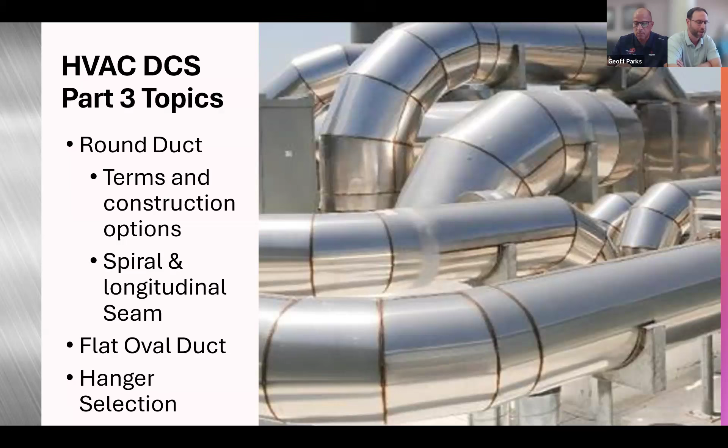As a recap for those who were with us at our last session, we went over rectangular ductwork, exterior and interior reinforcements. For this part, we're going to get into round ductwork, terms and construction options, using spiral and longitudinal seams. We're also going to get into some flat oval ductwork construction options, both spiral and longitudinal, and then some hanger selections. So jumping right into it.

So the first part here, we're looking at round duct joints and seams. We're going to check out the transverse joints first.

There's a little thing in the way of my screen. Got it.

First off, we have our RT1, which is our beaded sleeve joint. A couple things to point out on this one, it can be used for longitudinal or spiral seam applications. You want the sleeve to be at least the same gauge as the ductwork, minimum 4-inch long sleeve. Your attachment or screw requirements, use uniform intervals of at most 15 inches along the circumference, and then 3 screws minimum on duct diameters 14 inches and less.

The next one we're looking at down here is our companion flange, the RT2 or Van Stone flange. This one can also be used on longitudinal or spiral seam applications, and we have minimum flange sizes on this detail. For diameters up to 14-inch, we would require a 1-inch by 1-inch by 10 gauge angle, and duct diameters over 14 inches would be 1.5 by 1.5 by 1/8 inch. These companion flange sizes would not qualify as joint reinforcements, but if you want your flanges to qualify as a joint reinforcement, we would use table 3-4, which we'll get into shortly.

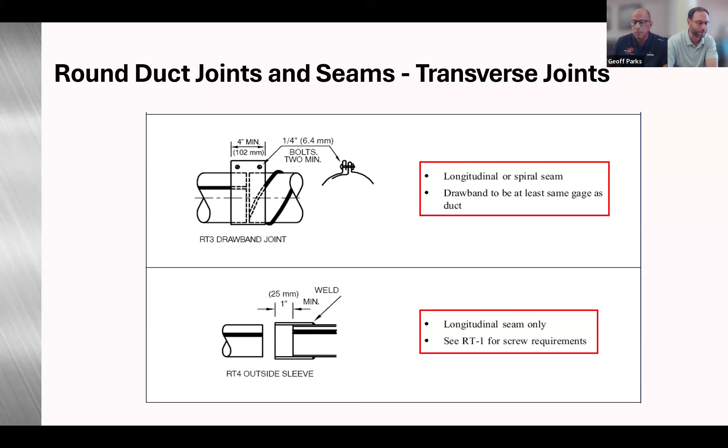Next up is the RT4, just below our RT3, the outside sleeve. This is going to be for longitudinal seam applications only, and you would follow the seam requirement or screw requirement for the RT1.

Next up, we have our RT5, the crimp joint bead option, 1-inch minimum lap, good for longitudinal and spiral. Again, you're going to follow the RT1 for any screw requirements.

And then we have our RT6, the swedge or bell. This is going to be a longitudinal seam application only, and also RT1 for your screw requirements.

Here we have next up would be the slip-on flange. If you recall from our last program, discussing this for rectangular, this is something that you would want to consult the manufacturers for their ratings established by the performance documented to the functional criteria in Chapter 11 of the Duct Standards. This is going to be your AccuFlange, SpiralFlange, any proprietary product that may have been reviewed by the SMACNA Testing and Research Institute would be on our website, and then it would be verified as an acceptable alternative to use.

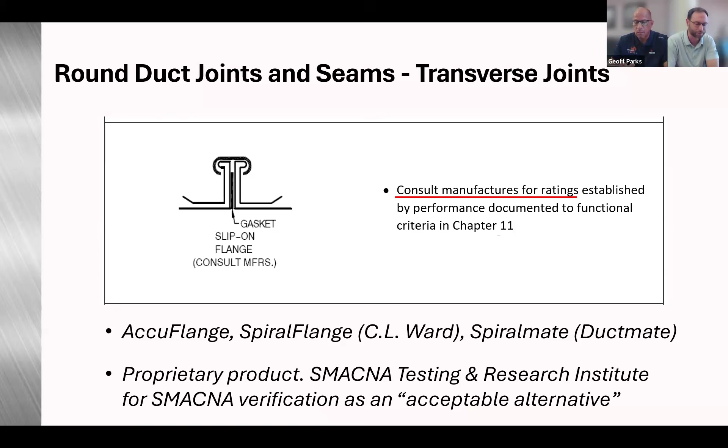Next up, we have our round longitudinal seams. So we kind of looked at the longitudinal or our transverse joints. Here we have an RL1 spiral seam. It can be used up to 10-inch water gauge and is good for positive or negative applications. Any pressures greater than 10-inch water gauge, we want to refer to the Round Industrial Duct Construction Standard, and also any duct diameter greater than 96 inches would put you in that round industrial as well.

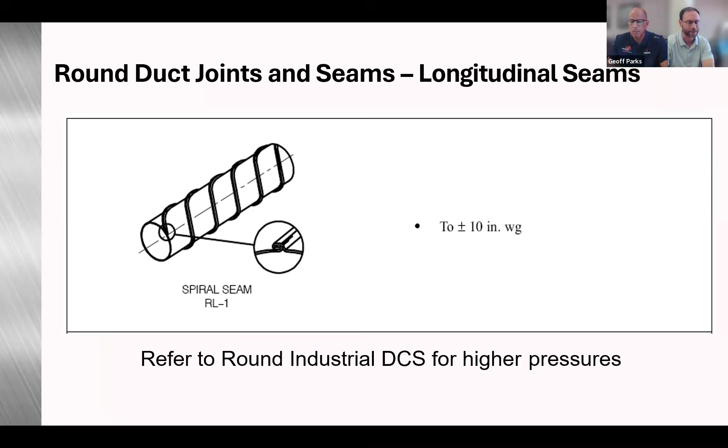Moving on with more longitudinal seam, we have the RL2, RL3, or lap joints. These can be used on positive or negative 4-inch water gauge applications. It is acceptable to 10-inch water gauge if it's spot welded on 1-inch intervals or tack welded on 3-inch intervals.

And then just below that, we have our RL4. This would be the butt weld or lap and seam weld, and this is also good for positive or negative 10-inch water gauge.

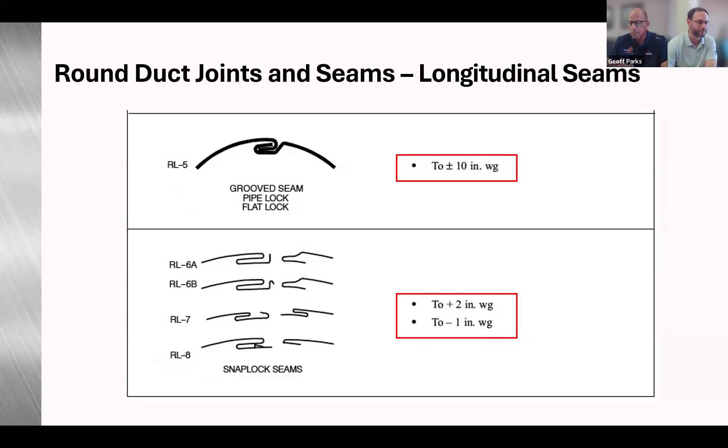Next up, we have our RL5. This is our groove seam, our pipe lock or flat lock, also good for positive or negative 10-inch water gauge. And then just below that, we have all of our different snap lock seams, RL6A, B, 7, and 8. This would be good up to 2-inch water gauge positive or negative 1-inch water gauge applications. Anything above those, you would need to look into some of the other longitudinal seam choices.

So I did mention our round reinforcements a little bit. In the standard, we have 3 tables: table 3-2, 3-3, and 3-4. 3-2 is going to be the angle ring size, so this is our reinforcement sizing requirements. Table 3-3 would be the ring attachment schedule, so this is your minimum attachment points to the duct wall. And then table 3-4 is going to be any companion flange joint that would be used as a reinforcement and qualify as a joint reinforcement.

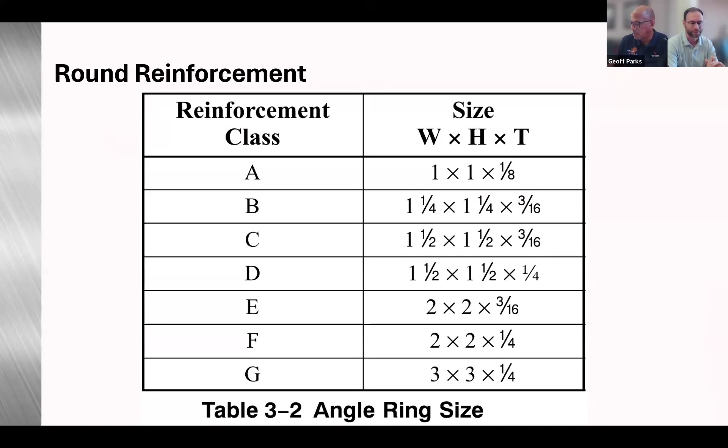Taking a look at table 3-2, as you can see, we have A, B, C, D, E, F, G reinforcement classes, starting at 1x1 by 1/8 inch, all the way up to 3x3 by 1/4 inch.

And then table 3-3, this is going to be your ring attachment schedules. This is based off of diameter size range: 6 and under, 12 to 7 inches, 18 to 13 inches, and so forth. The right side of this table is going to give you your number of attachment points. So if you have a 12-inch diameter and you're attaching your angle reinforcements, you would need a minimum of 6 attachment points.

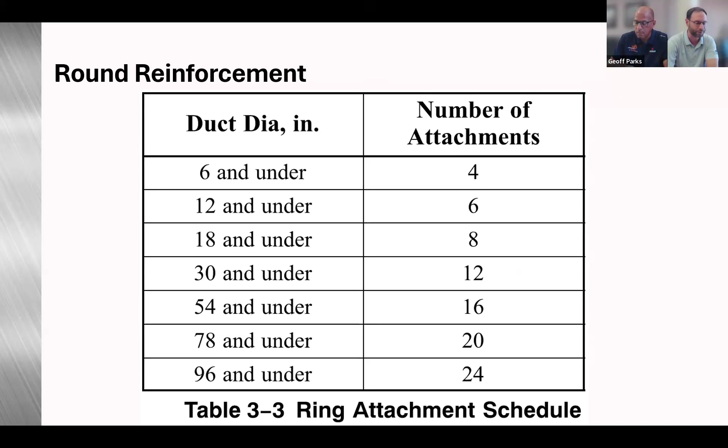All right, so round duct, a couple of things to throw out here. High strength to weight ratio uses the least amount of material to convey air. Fabrication for negative pressure is adequate for equal positive pressure.

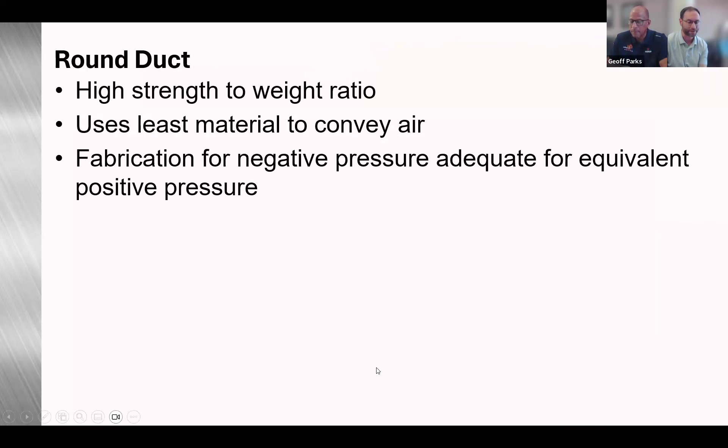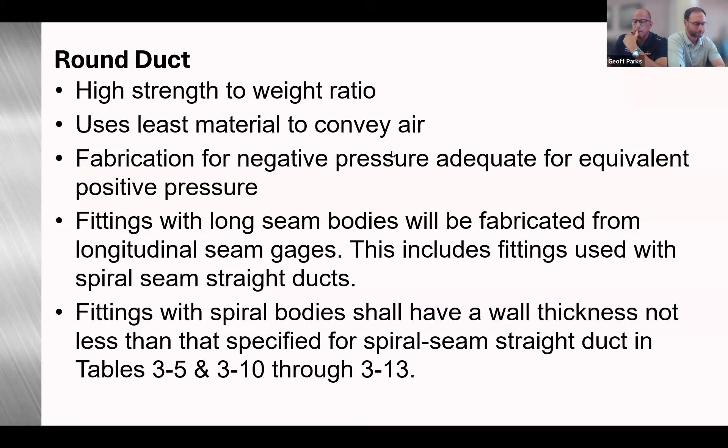Fittings with long seam bodies will be fabricated from longitudinal seam gauges. This includes fittings used with spiral seam straight duct. Fittings with spiral seam bodies would follow the same wall thickness, not less than specified for spiral seam straight duct. We have tables for these minimum gauges, which is table 3-5 and 3-10 through 3-13, and we'll get into checking some of those tables out a little bit later in the program. And finally, ribs and corrugations may add strength to round duct.

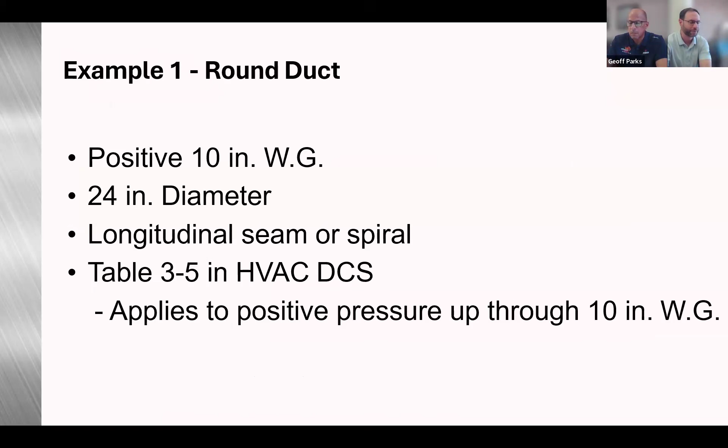So we're going to jump into an example here. This first example, we're going to build some positive 10-inch water gauge, 24-inch diameter round, and we're going to use either longitudinal seam or spiral seam for this. For this one, we would go to table 3-5, and this applies to positive pressures up through 10-inch water gauge.

So this is probably one of the easiest duct construction tables to read. You come to table 3-5, check your diameter range. For this one, we have 24-inch diameter. Our longitudinal seam minimum gauge is going to be 24, and our spiral seam minimum gauge for the same diameter would be minimum 26 gauge. At these gauges, no other reinforcements will be required. So this is the unreinforced round duct gauge up to 10-inch water gauge.

Yeah, but I'm muted. Oh. Now you are.

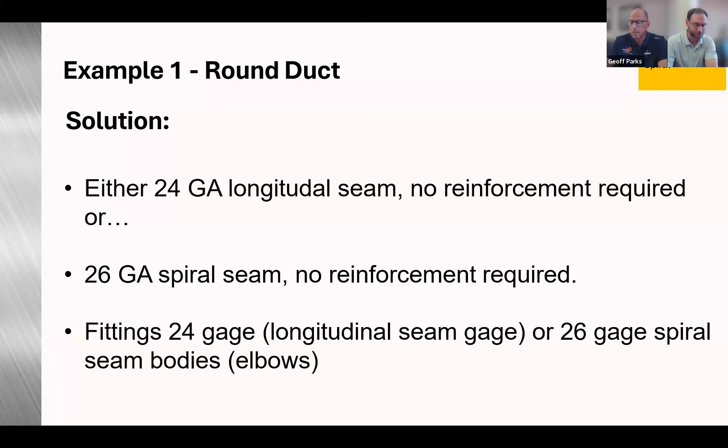All right, so for our solution here, this first example, we would have either 24 gauge longitudinal seam or 26 gauge spiral seam, and again both of those options would require no additional reinforcement. Our fitting gauges would be 24 gauge for the longitudinal seam, and if we were using a spiral seam bodied elbow, you would follow the spiral seam gauge, which would be 26 gauge for that elbow.

So next up we have a longitudinal seam round we're going to build. This is going to be a negative 10-inch water gauge, same diameter, and we'll be using longitudinal seams. For this one we would use table 3-6 through 3-9 in the duct construction standards for negative pressure longitudinal seams, while table 3-10 through 3-13 is for spiral. The negative pressure classes covered are negative 2-inch, 4-inch, 6-inch, and 10-inch water gauge, and within the tables there are multiple solutions available based on your reinforcement spacings.

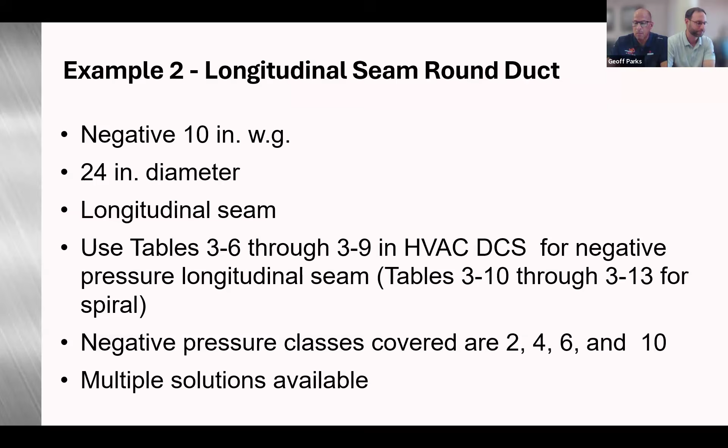So checking out this table, this is table 3-9. This is the minimum gauge required for longitudinal seam duct under negative pressure. Again, we're looking at 10-inch water gauge for this one. And you can see in the red rectangle I have here, there are many options based on either unstiffened, no reinforcements required, or stiffener spacing of 20 foot, 12 foot, 10 foot, 6 foot, all the way down to 5 foot.

So if we were looking to use the 5 foot section, something that you can roll within your roller machine, you would build this out of 24 gauge, and then you would need an A class reinforcement at the center of each piece, which would result in a stiffener spacing of 5 feet.

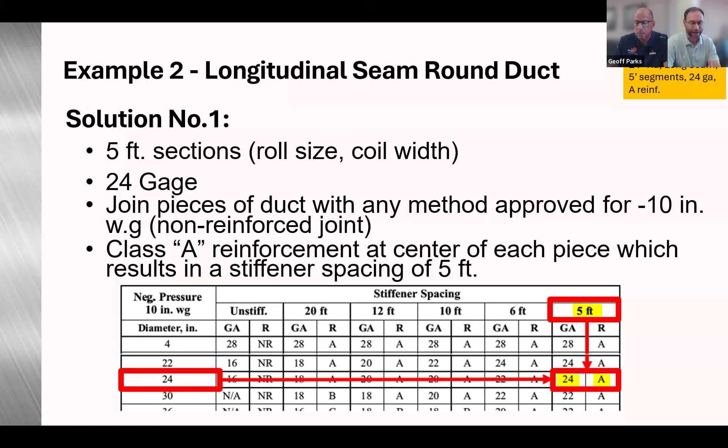So now we know, coming back to this one, we're using our 5-foot stiffener spacing. We have our minimum gauge, which is 24, and we have to find out what the requirement is for that A reinforcement. We'd go back to table 3-2 and check that an A reinforcement is going to be a 1 by 1 by 1/8 inch angle. Now we know what the angle size is.

We'd jump over to table 3-3, and this is going to give us our ring attachment points. Since we're looking at 24 inch, we'd go to the 30 and under, and it tells us we need 12 minimum attachment points for that angle. The rings may be attached to the duct wall using screws, rivets, or tack welds.

So this is an example of what that solution would look like. What we'd do is join 2 5-foot sections to make a 10-foot joint. You could use a beaded sleeve because that's good up to 10-inch water gauge. Then you'd have your A reinforcement class angles at the midpoint of the 5-foot sections, giving you a 5-foot stiffener spacing for that build.

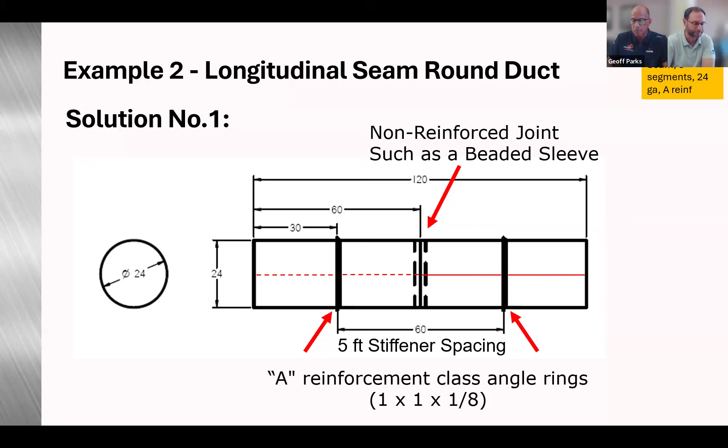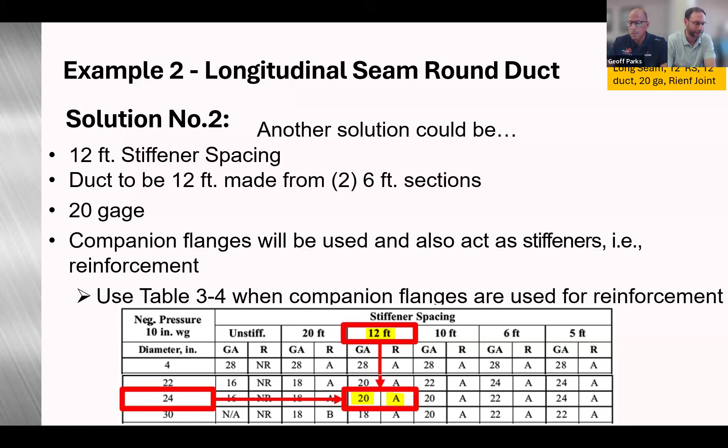Another option from the same table would be using 12-foot stiffener spacings. This could be made from 2 6-foot sections, taking into account that if you have a 6-foot roll capacity, this would be made out of 20 gauge. We could use companion flanges that also act as stiffeners for reinforcements. So what we'd do is check table 3-4 to see what the size requirement is for these companion flanges, and we're looking for an A reinforcement.

So table 3-4 is for companion flange joints used as reinforcements. Check, based on our duct diameter for this one, which was 24 inches, we'd look at our 13 to 25 inch diameter range. And it's telling us we need a 1.5 by 1.5 by 3/16 angle for that companion flange.

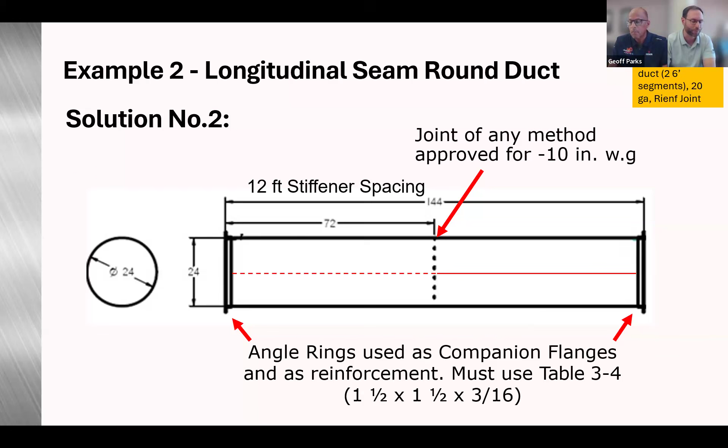So looking at a detail of how this build could possibly go, you have your 2 6-foot sections, and you could join with any approved method for negative 10-inch water gauge. This one, you can weld it, you can do a beaded sleeve, and so on. Then what we're doing is putting the angle rings as companion flanges on each end, making a 12-foot section, and that would be our 12-foot stiffener spacing. Again, those rings would be 1.5 by 1.5 by 3/16 rings based off of table 3-4.

A third solution could be making 16 gauge using the unstiffened, no reinforcement required column. You can make 2 5-foot piece sections, shop butt weld, and then no additional stiffeners or reinforcements would be required at this gauge.

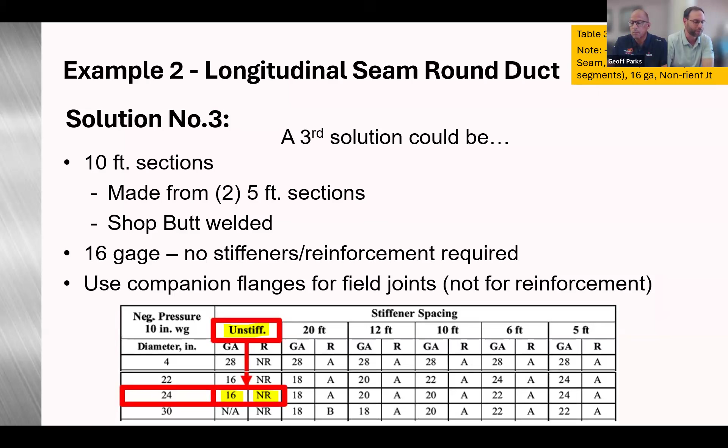You could also use the companion flanges for field joints that would not act as joint reinforcements, but for ease of field connections. Again, those companion flanges, from figure 3-1, have the minimum size of 1 by 1 by 10 gauge up to 14-inch diameter. So if we chose that route on this build, looking at 24 inches, we would need 1.5 by 1.5 by 1/8 inch. Again, those wouldn't count as joint reinforcements, but it doesn't matter because we're using minimum 16 gauge unreinforced.

And then this is a detail of what that third option would look like.

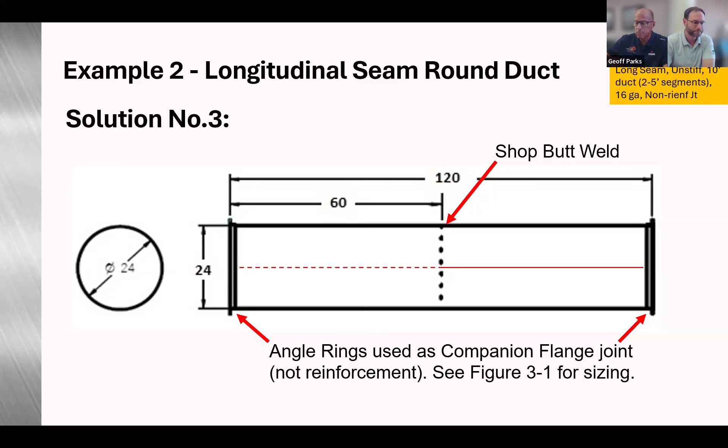So now we're going to look at an example building some spiral seam round duct. This is negative 10-inch, 24-inch diameter. We're going to get into the spiral seam tables, which are table 3-10 through 3-13, and more specifically we'll be looking at 3-13, which is for negative 10-inch water gauge.

As you can see from this table, it looks identical to the longitudinal seam, and it's also kind of mimicking the rectangular tables that we looked at a few weeks back, giving us our minimum gauge, our minimum reinforcement requirement, with an A, B, C, all based off of your duct size and the stiffener or reinforcement spacing that you select.

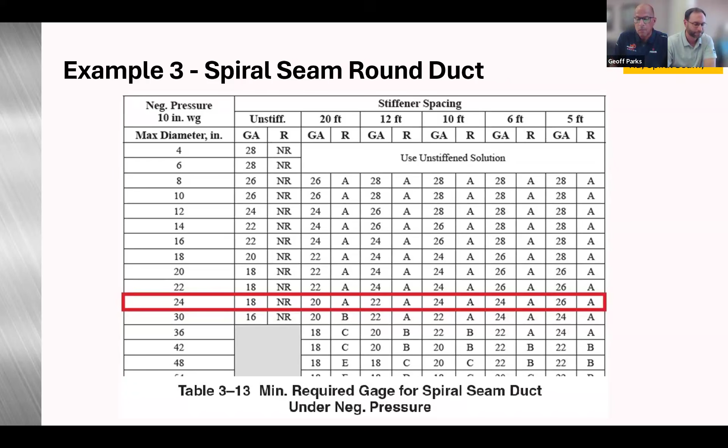So spiral seam round solutions. I'm not going to go through the whole thing, but the process is identical to the long seam. There's multiple solutions again, based off of unstiffened, no reinforcement, or 20-foot, 12-foot, 10-foot, 6-foot, 5-foot reinforcement or stiffener spacings.

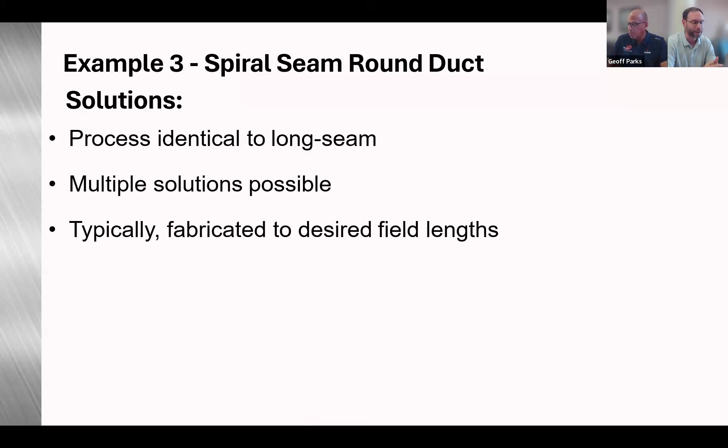Typically with spiral, you can fabricate to desired field lengths, instead of just sending out a 10-foot stick. You can set the machine to cut 24, 36, 30, whatever round length joint you want. Typically for spiral, lighter gauges are available than using long seam construction. Any fittings used for spiral duct systems are fabricated from longitudinal seam gauges, except when using the spiral seam body fitting elbows, which would follow your spiral seam gauges.

All right, a little bit of commentary on single wall round duct liner. You'll find this in section 7.6 on page 7.16 of the standard. Round ducts using single wall kerfed rigid board insulation liners do not normally require pins, adhesive, or other types of mechanical securement in straight duct sections.

But there are some exceptions. If the insulation slides easily in the duct, if there's a loose fit, on vertical runs or other risers greater than 45 degrees from horizontal, where the vertical drop exceeds 16 feet, clips must be installed on every other liner section and finished with a row at the end section.

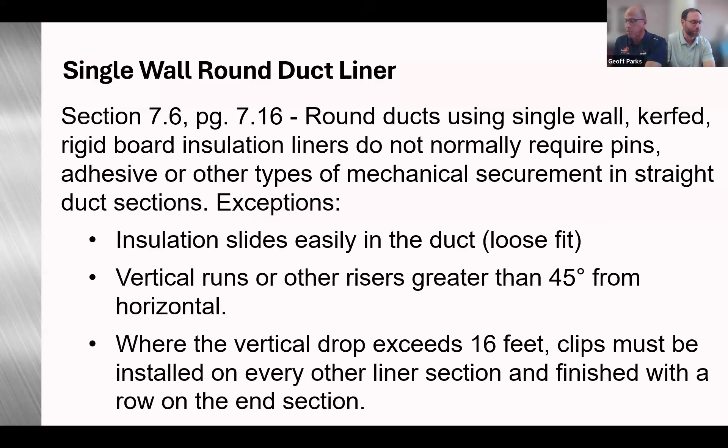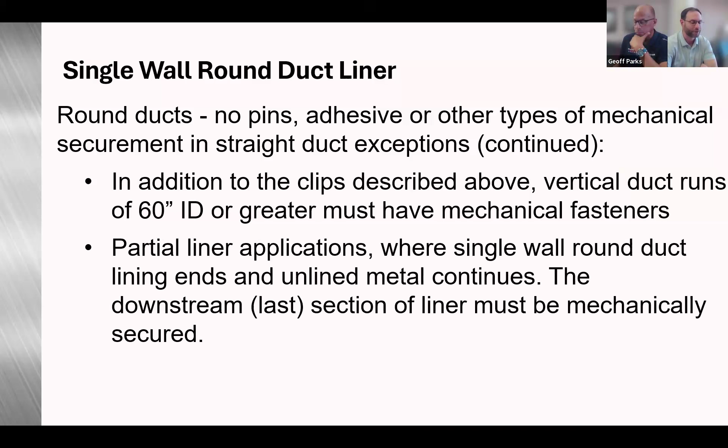In addition to the clips just discussed, on vertical runs of 60-inch diameter or greater, you must have mechanical fasteners. When you have partial liner applications, anywhere you have single wall round duct and the liner ends and the unlined metal continues, the downstream or last section of the liner must be mechanically secured. Negative pressure applications, obviously you're going to want to secure that liner. And you'll always want to follow the manufacturer's installation instructions as well.

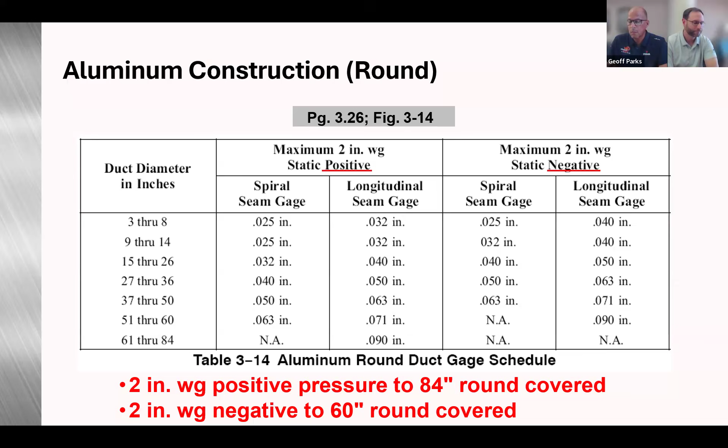All right, so we've got through our round duct construction options. Now we're going to check out some flat oval duct. The standard covers longitudinal seam positive pressure, and then spiral seam positive and negative pressure.

Longitudinal seam minimum wall thicknesses would follow table 3-15 for the minimum gauges, and that's going to be based off of the major dimension of that flat oval ductwork.

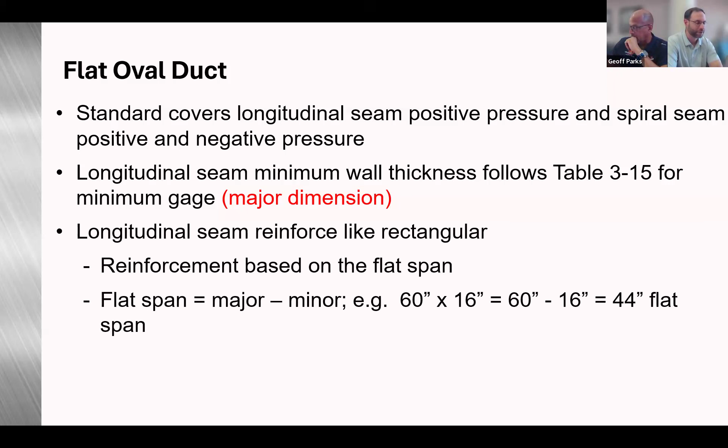Longitudinal seam flat oval is reinforced like rectangular, and that reinforcement is going to be based on the flat span. Your flat span is equal to the major dimension minus the minor dimension. So if we had a 60 by 16 flat oval duct, you would do 60 minus 16, which gives us a 44-inch flat span. That's what you're going to use to base your reinforcements on.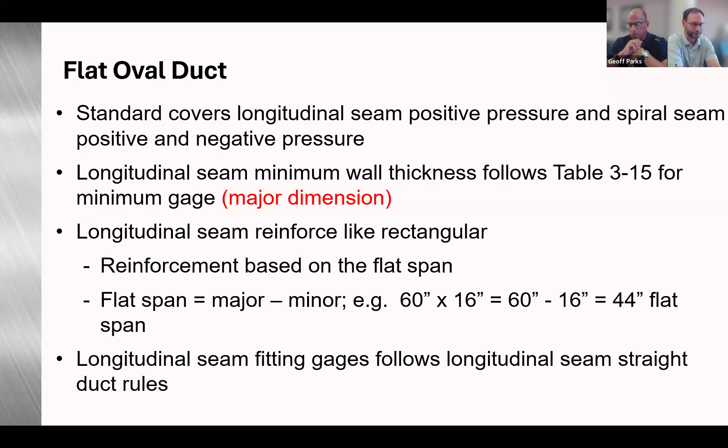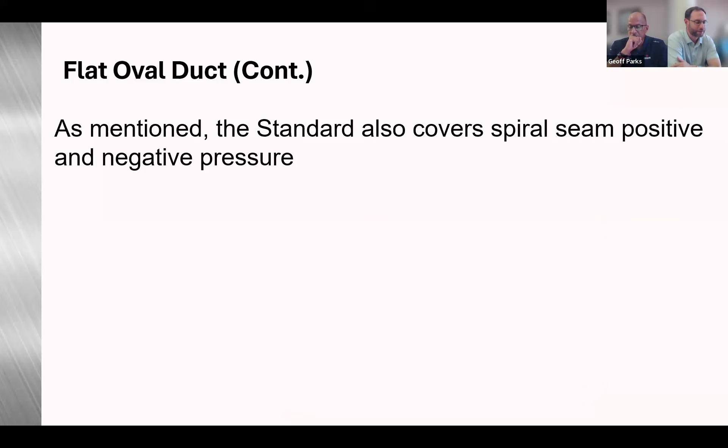Like I mentioned, the standard also covers spiral seam, positive and negative pressure. These construction tables are separate construction reinforcement tables, table 3-16 through 3-22.

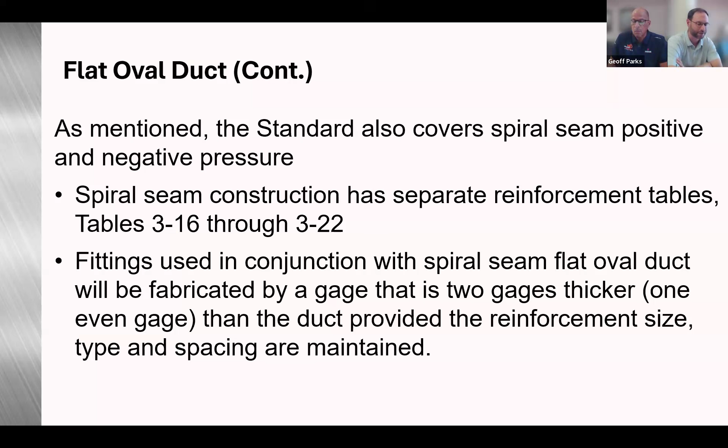Any fittings used in conjunction with the spiral seam flat oval duct, you would fabricate 2 gauges thicker—1 even gauge heavier than the duct—provided that the reinforcement size, type, and spacings are maintained. Sometimes working with really big elbows there's a little bit of confusion on how to reinforce, but you would just maintain, say you pick a 4-foot reinforcement spacing, you're just going to maintain that 4-foot reinforcement spacing throughout that entire fitting.

So for longitudinal seam flat oval duct, here we're looking at table 3-15. This is your minimum gauge up to positive pressure 10-inch water gauge. This is based off the major dimension, not the flat span, but the major dimension of the flat oval duct. As you can see, we have your longitudinal seam minimum duct gauge and the fitting minimum duct gauge associated with those major dimensions.

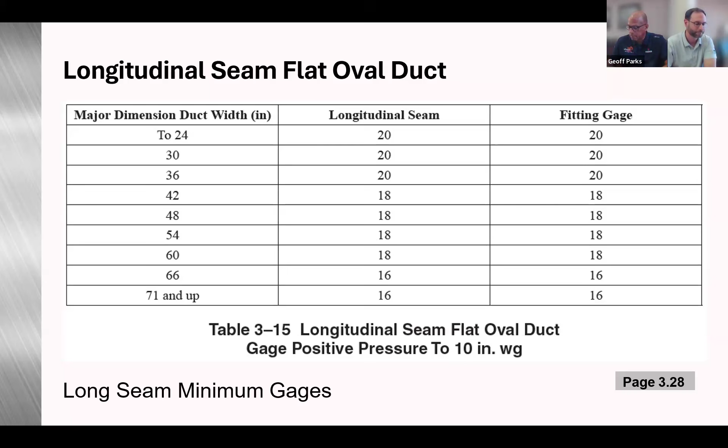Jumping into an example, building some longitudinal seam flat oval duct. For this example, we're going to be looking at 46 by 20 at positive 10-inch water gauge. We have our major dimension of 46, our minor of 20, and our flat span is going to be 26 inches. So first step, we need to determine our minimum gauge, and that's going to take us to table 3-15.

Again, for this table, we do follow the major dimension—it's based off the major dimension. Just throwing that up again to reiterate our flat span. So jumping to table 3-15, based off of the major dimension we have, we're going to be looking at the 48-inch row, which gives us a longitudinal seam requirement of 18 gauge and a fitting gauge requirement of 18 as well.

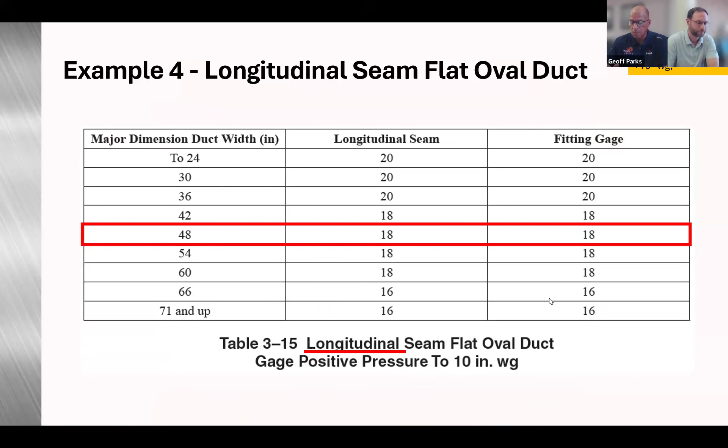So now we know the minimum gauge. Next, we need to determine our reinforcement requirements. And like I mentioned earlier, this is going to be based off of the flat span, which for this particular example is 26 inches.

So now we need to go to the correct rectangular duct construction table. We would select our reinforcement spacing, and then determine which reinforcement class requirement we have based off of that flat span and the reinforcement spacing we select.

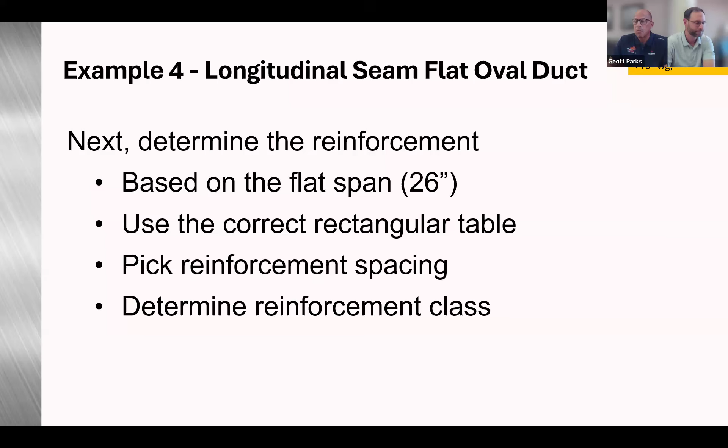For this example, we would follow the 10-inch water gauge construction table, and our flat span is again 26 inches. We have the option to pick from 8-foot reinforcement spacing down to 2-foot reinforcement spacing. This table simply tells us which reinforcement code we need to follow, because we already selected the gauge from table 3-15.

So if we were looking to build this duct with 5-foot reinforcement spacings, we would need an H18. The 18 we can ignore because we already had that gauge selected from the previous table. So we're going to look at either the H, or we can do a G class reinforcement while using or adding a tie rod.

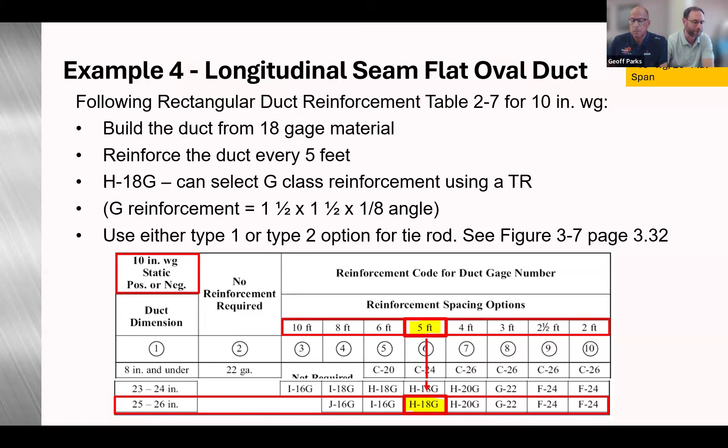So now we're going to look at spiral seam flat oval duct. We checked out longitudinal seam, now we can go into spiral seam. We're going to use the same flat oval duct size for this one, 46 by 20, looking at 2-inch water gauge. Again, we have our major dimension, minor dimension, and flat span all equal to our previous example.

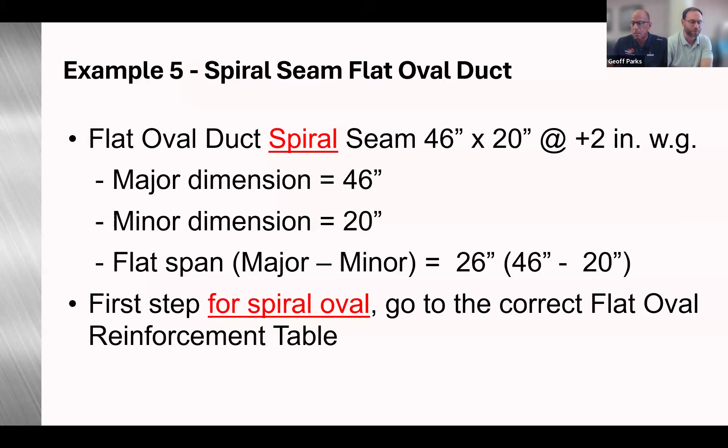But for this one, we need to make sure we go to the correct flat oval reinforcement table. So for that, we would be looking at table 3-18. This is going to be the spiral flat oval reinforcement table, and this is all based off your flat span. For our example, we're still looking at a 26-inch flat span.

And we have some options here. We can choose the unreinforced column, which would give us 18 gauge. There's a 12-foot reinforcement spacing, a 6-foot reinforcement spacing option, and then a 3-foot reinforcement spacing option.

So if we were looking at the 6-foot reinforcement spacing option with this flat span, we're looking at an external reinforcement class of an E, minimum duct gauge of 22. And then there's also an option to add a tie rod, and that's telling us we would need 1 tie rod for this particular build. So it's either you would follow the external reinforcement or the option of 1 internal tie rod. Both are not required.

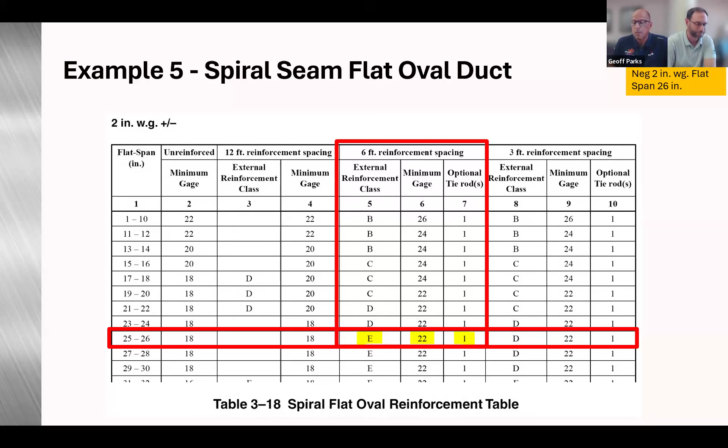So following the spiral seam flat oval table, table 3-18, we would build the duct from 22 gauge. We reinforce the duct every 6 feet based off of our reinforcement spacing that we selected. We would use the E-class external reinforcement, or optionally, we could use 1 tie rod. And then any fittings fabricated would be 20 gauge based on that 2-gauge rule, or 1 even gauge heavier for your fittings.

So double wall round and flat oval, we went over rectangular double wall in our last program. And again, this is similar in construction to that rectangular double wall. The inner wall is typically not attached to the outer. Primary function is to attenuate sound. And then you also still have the risk of through-metal or condensation with double wall round and flat oval, similarly to rectangular.

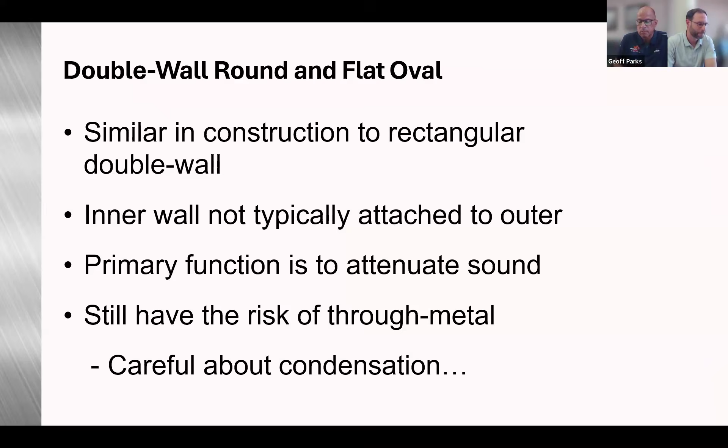And just throwing that detail up here again for through-metal concerns. All right, throwing up a couple double wall flat oval details. You're going to have your outer pressure shell, which is going to be your construction shell, and then you have your inner liner, same as rectangular double wall.

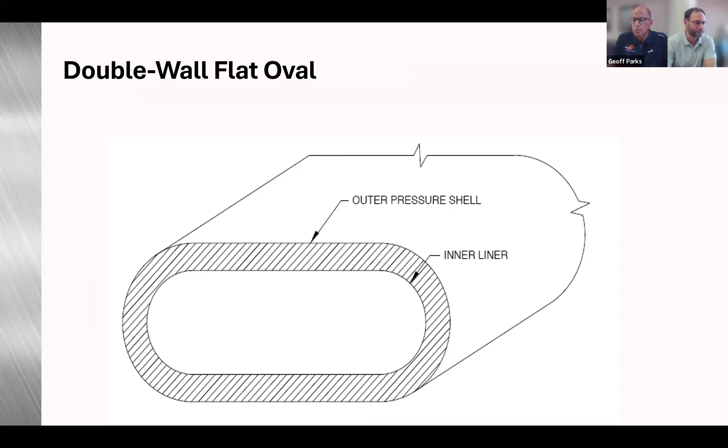Some fastening requirements: your outer sleeve needs to be a minimum of 4 inches long. Inner sleeve is going to be a minimum of 6 inches. And then both the inner and outer sleeve would need to be the same gauge as your outer pressure shell.

On the outer coupling, screws must be used at uniform intervals, 15-inch max along the circumference, and 3 screws minimum on 14-inch or less.

Here we have a couple other duct joint options in the standard. Figure 8.2 for double wall round, that's going to be a drawband type on the outer pressure shell with an inner collar or inner sleeve coupling. And then you also have figure 8.10, which is a Van Stone option as well.

There's a 4-inch minimum on that angle ring. And then obviously you also have your inner sleeve as well. This would require a minimum of 3/8 inch flange on the ductwork for that Van Stone connection.

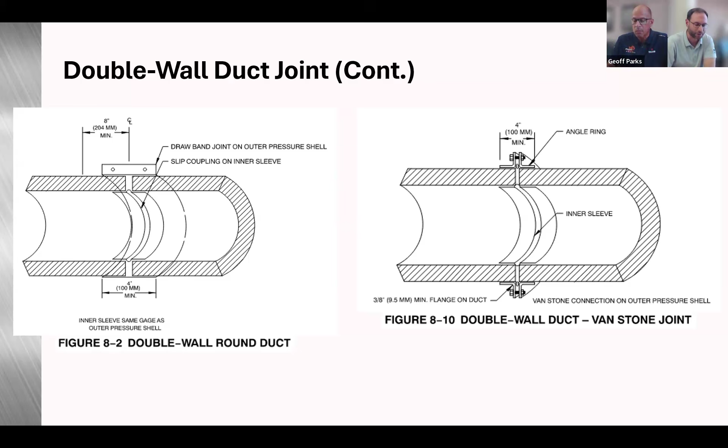All right, so we've gotten through round, we've gotten through flat oval. Now we're going to get into a little bit of hangers and support systems.

Some basic definitions of hanger components: your upper attachment, which is the attachment up to the structure, your lower attachment, which would be between your hanger and your trapeze or ductwork. Then you have your hanger, which is the vertical section, which could be wire, rod, or strap. And then your trapeze, which is your horizontal section, your angle, channel, and so forth.

Here we have just the different options that are laid out within the standards. I'm not going to read through each and every one, but I do want to point out the big red text in the middle there. So this is an important one: your allowable load on the upper attachment, which is going to be 1/4 of the failure load of that upper attachment. So that's kind of the main thing I want to point out with any upper attachment requirements to the structure, 1/4 of the failure load.

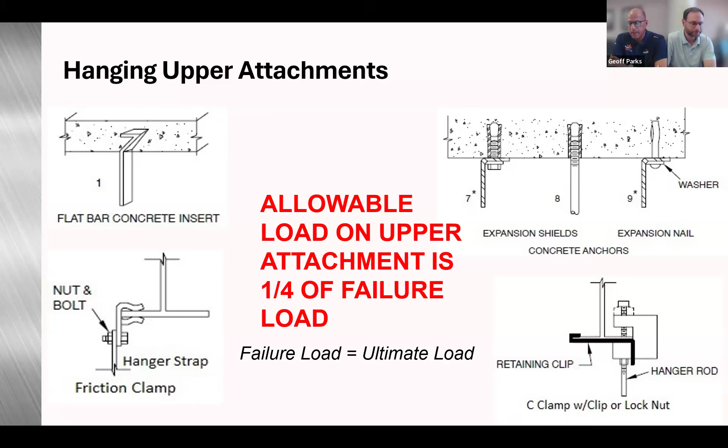And just a note for our California contractors, the flat bar concrete insert shown in the upper left, we did test that in accordance with ASCE 7 requirements, and it did pass fully. So we do comply with the requirements of ASCE 7 for inserts that you would use in projects in the state of California. We also tested, as Geoff is showing here now, the wire coil and also the 1-inch minimum double circle. We tested all those in accordance with ASCE 7 and they passed.

We do have a technical resource bulletin that's posted up on our website under technical services for that, if you need to use that for discussions with the general contractor, the inspector, whatever it might be. But that information is available, the test results are there also.

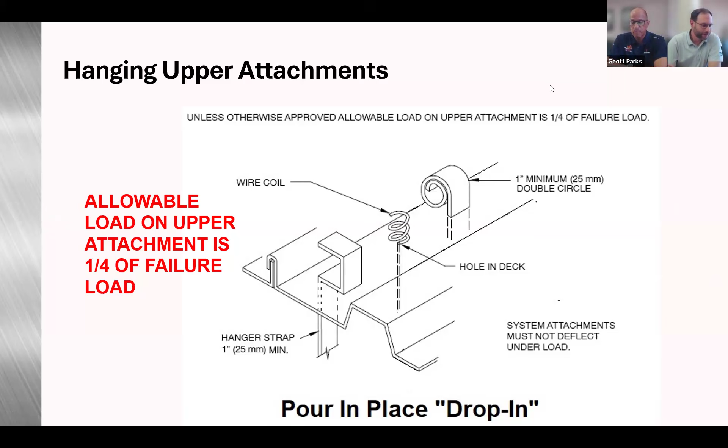Perfect. Thank you. All right.

Now some hanger lower attachments. Left detail is going to be your hanger strap. Then there, 1 screw, 1 foot, a 1-inch minimum foot on your strap hanger with 1 screw at each foot. And screws may be omitted if the hanger loops as a continuous loop underneath your duct.

Looking at some round hanger lower attachment options, wire is good up to 10-inch diameter. And this isn't wire that we're talking about like a gripple or anything like that, this is just thin shot wire. Everybody freaks out, but this is not the pre-stressed aircraft cable, this is just a wire.

So the next one over in the middle, up to 36-inch diameter, this would require a single hanger strap and then a separate single band. You would want that band to be the same size as the hanger strap.

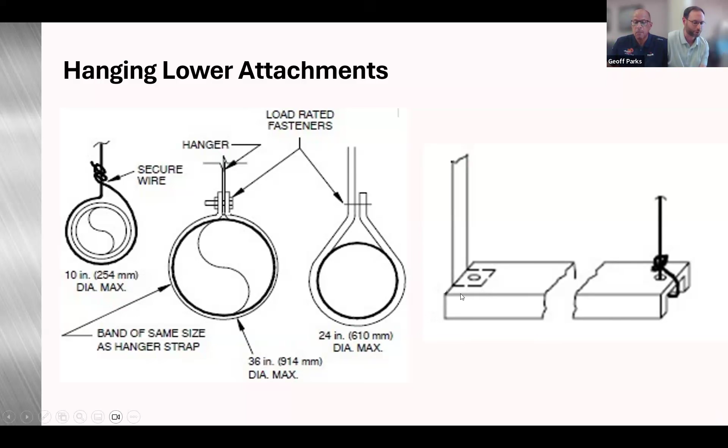Once you get into diameters that exceed 36-inch round, you're going to have a two hanger requirement, and that again is either going to be rod, wire, or strap. For this detail, we are showing double saddle strap, saddles top and bottom. That is not a requirement of the standard to have both of them, but if the duct does deform and become out of round, you would look to add the top band.

When you're using strap hangers, 60-inch max is kind of the requirement for hanger strap, unless the foot of the strap is placed under the bottom of a reinforcement. So if that strap hanger happens to land on a duct reinforcement, you are permitted to go wider than that 60 inches.

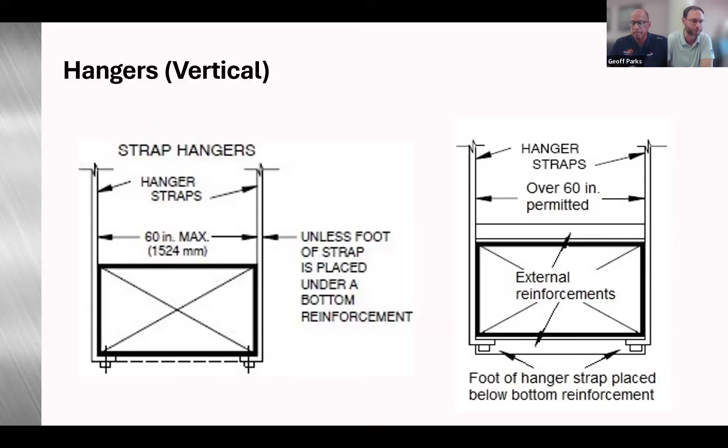And here we have our cable hanging system. For this, follow the manufacturer's installation instructions. You can visit the SMACNA Testing and Research Institute website for any that have been SMACNA verified as an acceptable alternative, but the most important thing to note is to follow the manufacturer's installation instructions. These are not permitted to be used in any area where you have moisture, such as a pool application, since the devices just don't hold up in those situations. Also, when we're talking about static ductwork, you want to make sure the locking mechanism is perpendicular as shown in the detail here. They have different styles for seismic bracing, which would be different than what we're talking about here, which is just basically hanging static ductwork.

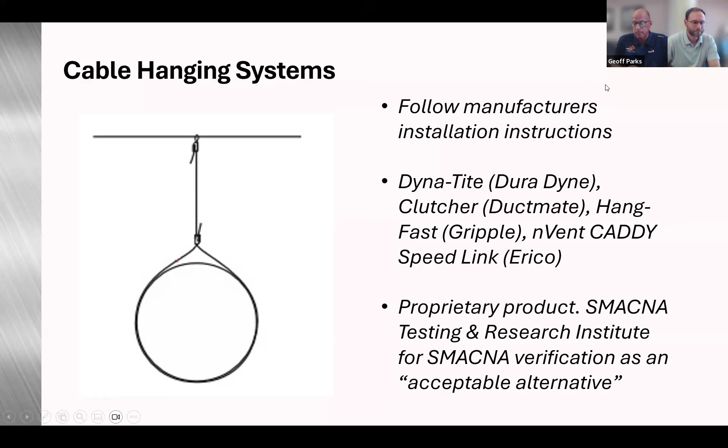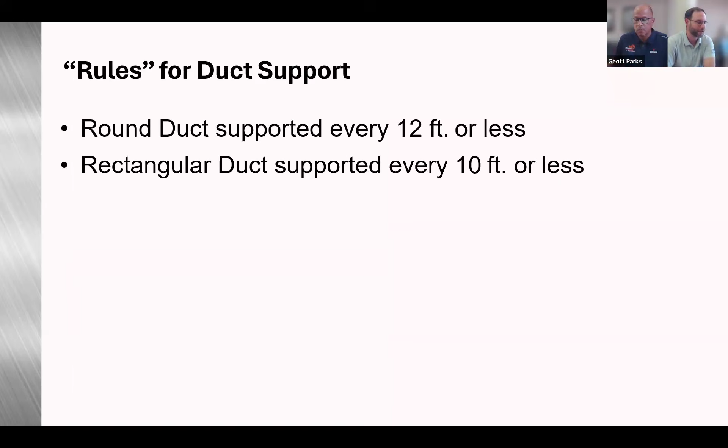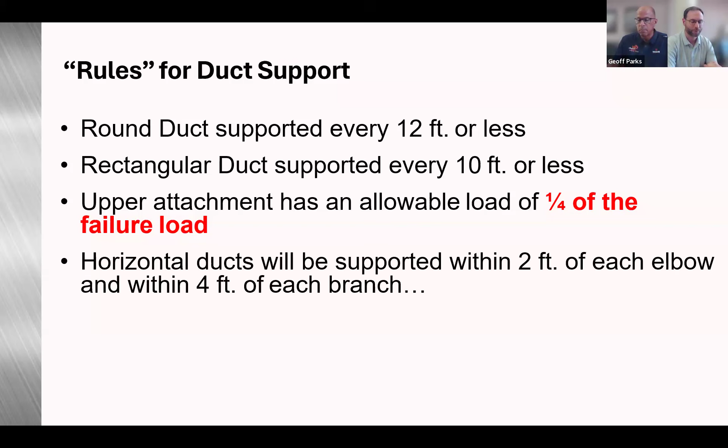Some rules for duct supports: round duct supports are going to be every 12 foot or less, rectangular duct supports every 10 feet or less. Again, upper attachment has an allowable load of 1/4 of the failure load. Horizontal ducts must be supported within 2 feet of each elbow and within 4 feet of each branch.

Here's the next newer detail added in the current edition. Again, you want at least one support within the shaded zone, which is 4 feet or 48 inches on either side of the branch or tap. You would not want to position a support directly opposite of the branch line; you'd want to relocate that to the other side. No supports are required at the branch directly off of it, unless the maximum support spacing on the main duct is exceeded due to the branch size. So if you have a super large branch bigger than the support spacing you're using, you would need to add a support on that branch within 1 foot of that main.

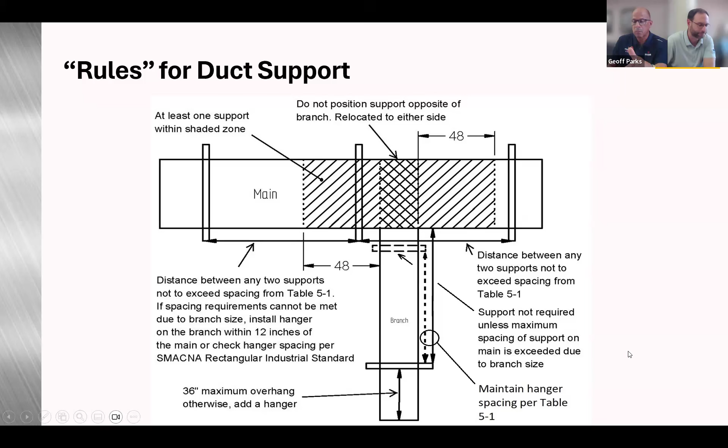All right, now we're looking at table 5-1, your rectangular duct hanger minimum size. This is all based off of the maximum half perimeter of the duct, and then you're going to look at either, your hanger sizing is based off of 10-foot spacing, 8 foot, 5 foot, or 4 foot.

We have some single hanger maximum allowable loads. For your strap, for instance, a 1x22 gauge is going to have a single strap maximum load of 260 pounds, and a wire or 1/4 inch rod would be 270 pounds per single hanger.

That last box gives us requirements for when you have straps that need to be lap joined. We give you a 1x18, 20 gauge, or 22 gauge strap. If you have it, it would require 2 number 10 or one 1/4 inch bolt.

You would want to place the fasteners in series, not side by side. This actually came up about a month ago - someone was getting called out on this. They had inserted the deck, and their straps got cut, or somebody cut them, so there was a little bit hanging out of the deck. They came in, followed this requirement, and were getting called out on it anyway. But we were able to help them by pointing them in this direction - it is acceptable per the standard to lap the straps.

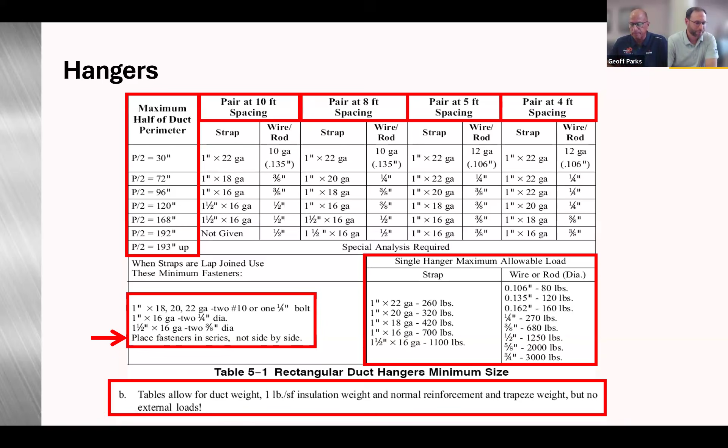Now we're going to get into an example - we're going to size some supports. For this one, we're going to look at single wall, 36 by 24, wrapped ductwork. We're going to pick an 8-foot interval spacing for our supports, assuming the duct has been built correctly using the duct construction standard. This would be based off 22 gauge duct for that size, and we would use table 5-1 on page 5.7.

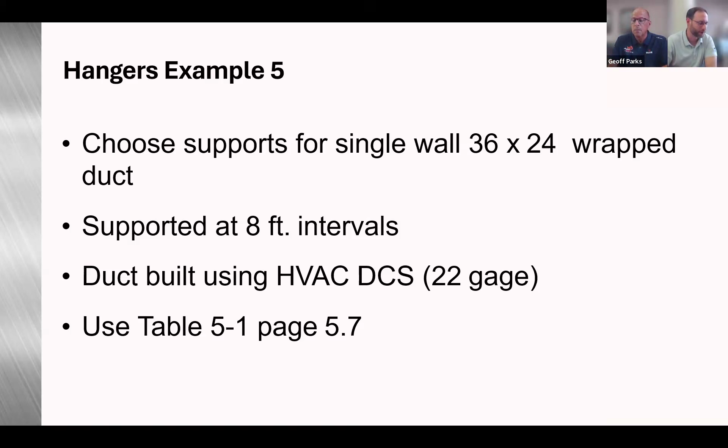Jumping to 5-1, we would find the half perimeter that works for our duct sizing. 36 by 24 gives us a half perimeter of 60 inches, which exceeds the 30-inch row, so we need to move up to the next category - P divided by 2 equals 72. We slide over to our second column with our 8-foot hanger spacing, and it tells us we're going to need a 1 by 20 gauge strap or a 1/4-inch rod for that.

So our hanger solution, which is our vertical, is going to be a 1 by 20 gauge strap, or the 1/4-inch rod if you had to go with a trapeze. But most everybody's going to use a 1 by hanger strap for this type of application and size - trapeze is not required. For the upper attachment, we would use a method that would support a 1,280 pound tensile load. This is the ultimate conservative method to size that upper attachment.

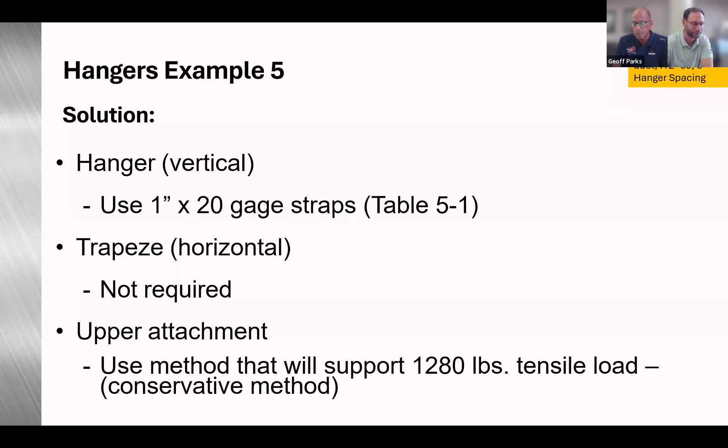So that solution would be a 1 by 20 gauge, and the max load for that single strap is 320 pounds. This is where we get that 1,280 pound safety factor - doing the 4-to-1, or the 1/4 the upper attachment, that would be 320 times 4, giving us 1,280 pounds. But in reality, the duct's going to weigh closer to maybe 125 pounds per 8-foot section.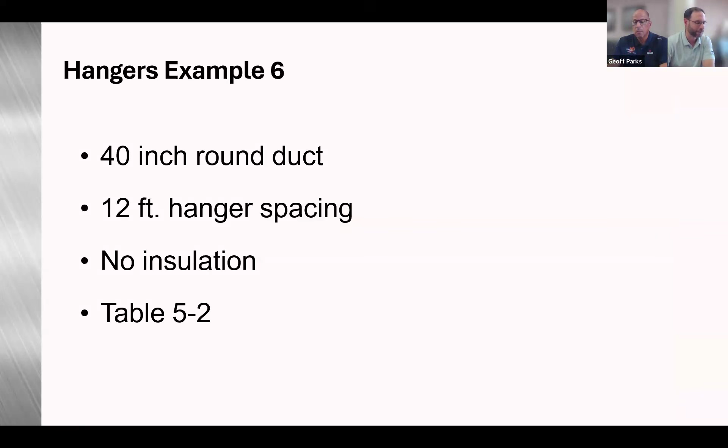So looking at a round duct hanger example, we have a 40-inch round, looking at 12-foot hanger spacing, no insulation, and we're going to use table 5-2 for this one.

Jumping to table 5-2, our minimum hanger size for round duct - we would look at our 37 to 50-inch diameter range, since we're looking at 40-inch round. It's telling us we need either 3/8-inch rods or 1-inch by 20 gauge straps.

So our solution for this one is 3/8 rod or 1 by 20 gauge straps. We would use 3/8 rods, or you can also use 1 by 20 gauge strap if you'd like.

And then for the band, you would either match the thickness of the hanger straps or the duct. So when sizing your band gauge, if the duct ends up being 18 gauge but your strap is 20 gauge, you would want to size that band 18 gauge for the ductwork. Wider is better for heavier loads to minimize localized buckling at that band. And as noted earlier, it must keep the round shape, so a half band may be used if the duct shape is maintained.

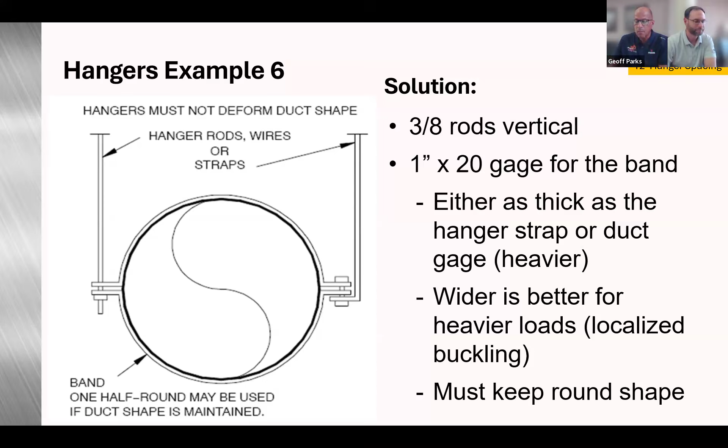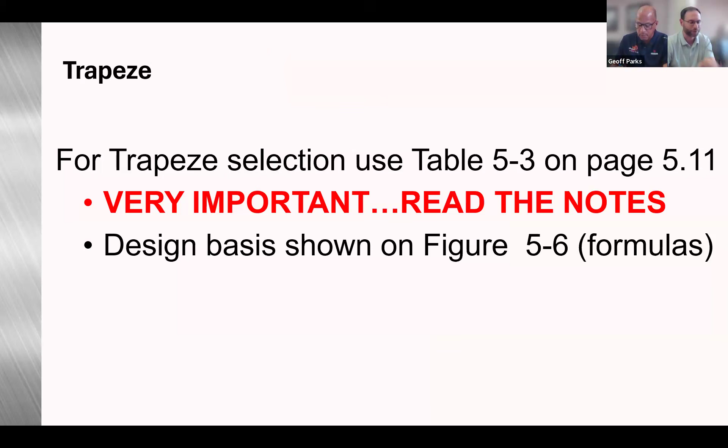So for trapeze selection, we would use table 5-3, which is on page 5.11 of the duct construction standards. There are some pretty important notes you want to make sure you're following on that table. The design basis is shown on figure 5-6 - these are all the formulas that went into building table 5-3.

And then we get into an example, which I'll get into this table in more detail. There's also alternatives to use framing channel or strut - these would be equivalent to what's shown. Once you select a size from table 5-3, if it's telling you need a D trapeze size, you can come to table 5-4 and size channel or strut that would be equivalent to that D.

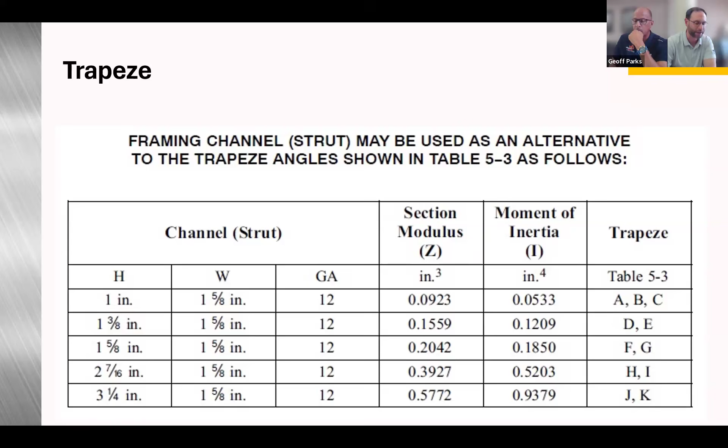So if we looked at example 5, which was 36 by 24 with 8-foot hanger spacing, that was telling us about 125 pounds per 8 foot for ducts less than or up to 96 inches. We had that A dimension where we needed 6-inch max from each side of the duct. So we would come to size the trapeze on table 5-3 using that 6 and 6 on either side, which would actually give us a trapeze selection of 48 inches versus the actual duct width of 36 inches.

So it's important to understand, when using table 5-3, you're going to want to use the actual trapeze length versus the duct width.

So for trapeze load calculations for any shape other than what's listed in table 5-3, here's the load diagram. We always say just call SMACNA for assistance and we'll walk you through what the options are, or we can go into the rectangular industrial section to start sizing hangers from there as well.

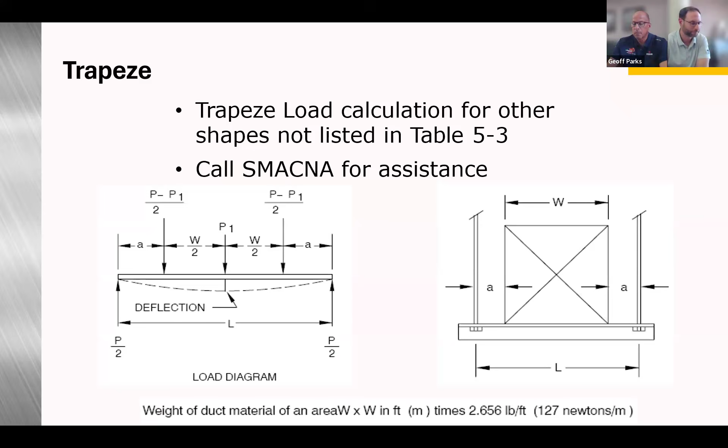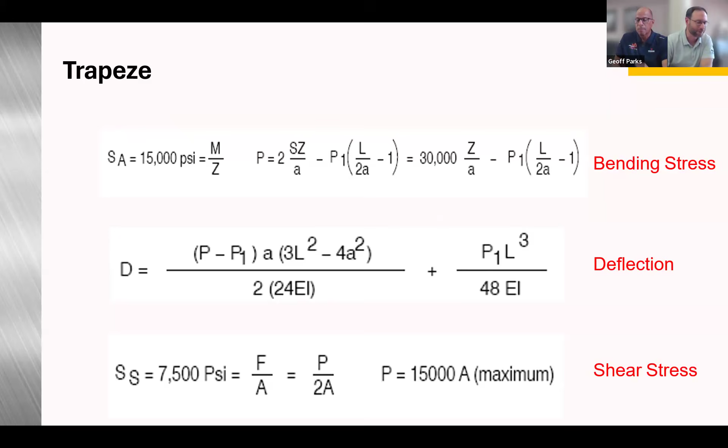And here's just some of the math that hurts my head - here's your bending stress, your deflection formula, your shear stress formula. Again, call us so we don't have to mess with any of these formulas.

Few things to point out for these supports on the walls. You can weld, bolt, or use a number 8 screw. Deviation is permitted by other analysis.

But what I did want to point out is your X and Y dimensions. So for X is going to be 1 inch. Our Y dimension is going to be 2 inch. Then you're going to add any other attachment points to accommodate the load. There's a minimum of 3 on 24 inch wide and up. And you're going to want to add these fasteners or attachment points along the side nearest to the anchors. So you only need one Y on, I would say, the outside, and then you would follow the X and the Y on the one closest to the anchor.

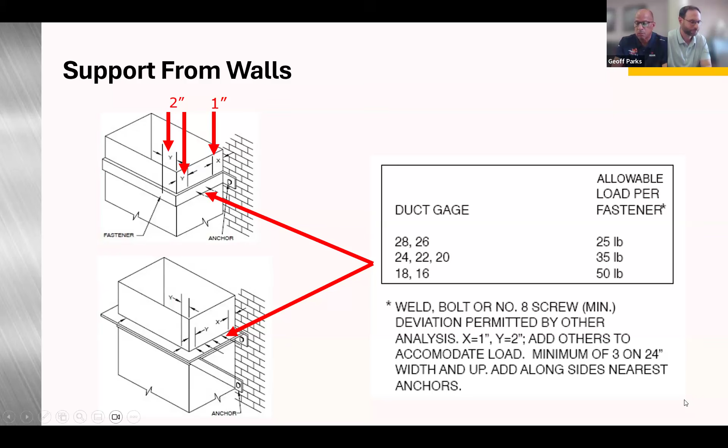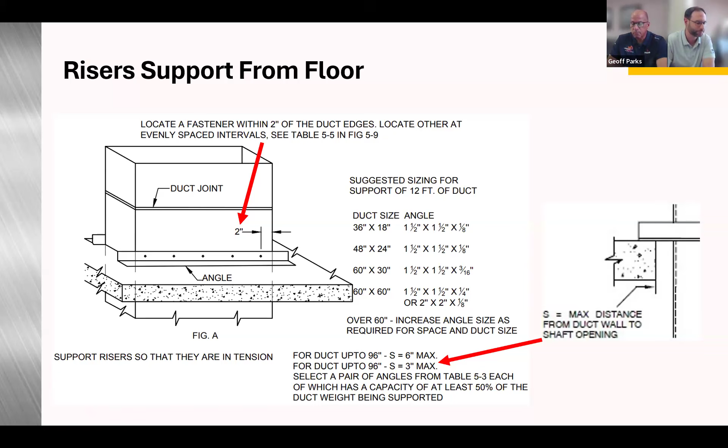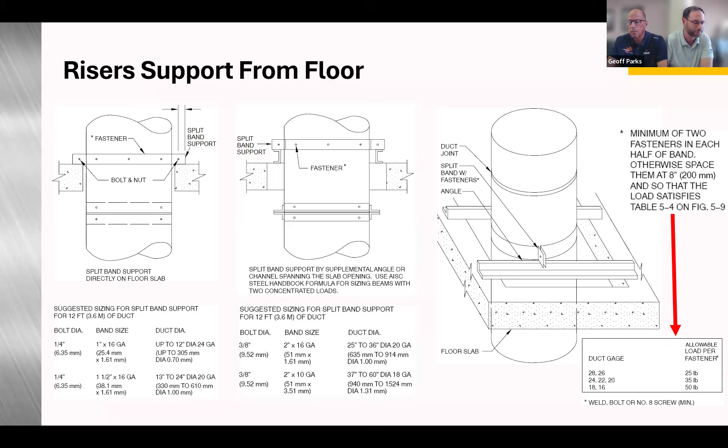And if we were looking to size the supplemental supports, this isn't something that you're going to do within the HVAC duct construction standards, but we can do that using the industrial duct construction standard. Over the next couple slides, we have how to go about doing that.

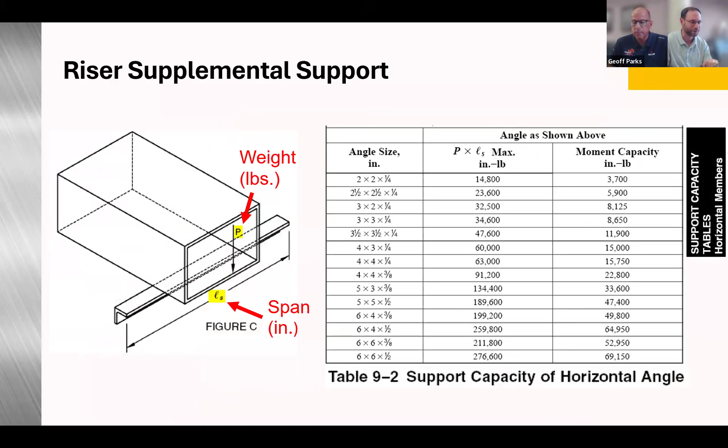Okay, so I did have another program or slides that I wanted to throw up. I thought I was going to get through this one a little bit faster, but I wanted to get into the SMACNA website and show the offerings to members there. If you have questions on utilizing this type of supplemental support, you'll have my email, and you can email me directly and I can walk you through it anytime.

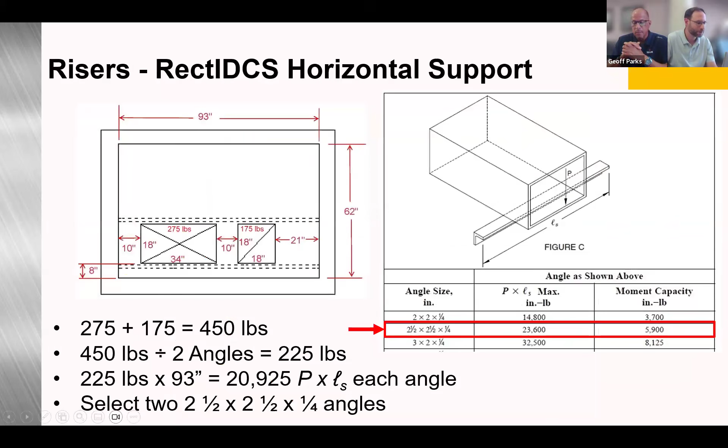Give me one second. These riser support details, we have to go to the industrial manual. That's usually with some pretty good sized ductwork. That's why we want you to give us a call, and we'll help walk you through the calculations, since we've been around this corner lots of times with large duct applications. It's easier for us to ask you some information, run the calcs for you, give it to you, and explain how we got to that solution. Then you can do it yourself afterwards.

But we want to get to talking about some of the things that are available to SMACNA members on the tech side of our website. And we haven't done this for really anybody that I can recall in the last year or two.

No, I started doing it about one program ago. We want to fill you in on what's going on out there as best we can, because sometimes the principals know about this stuff, but the project managers, senior people, and foremen might not know. We'd like to make sure you have this information.

We, over the last year or so, started taking a poll when we're out on the road doing these programs in person, asking who's been on the website, who's seen our apps, and we don't normally get a lot of hands. So I built this PowerPoint to highlight everything that is available to members on the website.

And here we go. You're going to get PDFs of this page. This is an overview of all the resources available, and maybe not even all of them, I'm probably missing some, but obviously our standards, manuals, guidelines. More specifically, what's on the website is our on-demand videos, web-based apps, phone apps, and the technical inquiry form lives on the website. Those are the things I wanted to touch on today specific to the website.

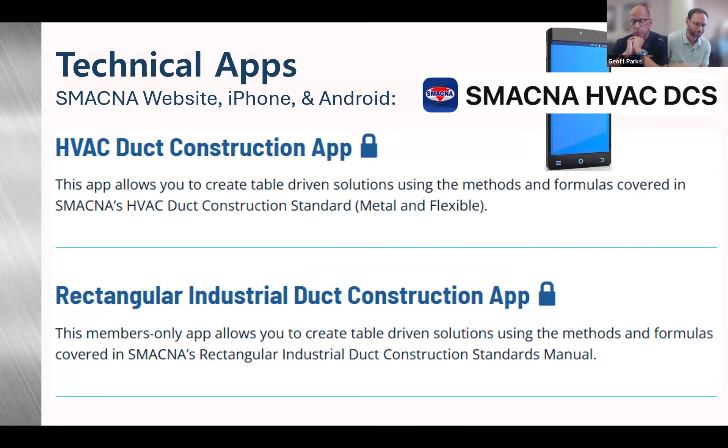You'll notice some of them had lock marks next to the titles, some did not - the ones that are locked are behind the member login and are only accessible to SMACNA members. As for future apps, we're always out on the road asking what you guys see that could help you, as far as a web app or phone app, so we're always trying to get that feedback to improve what offerings we have.

And with that, we're now going to go check out the actual apps.

This is my contact information and my email, and again, this will all be available in PDF format within the next couple of days.